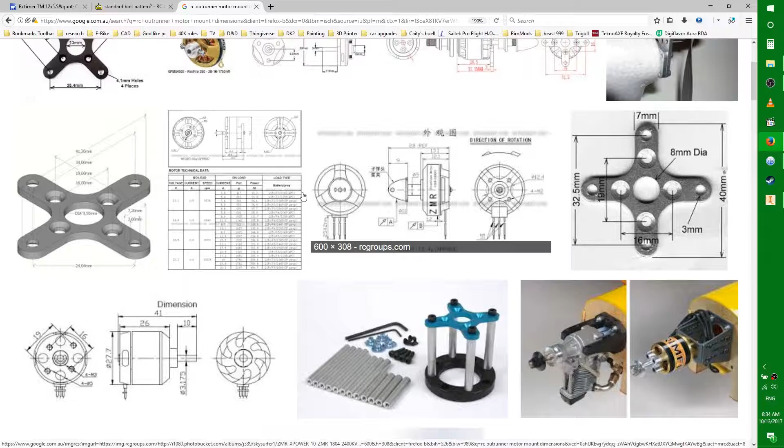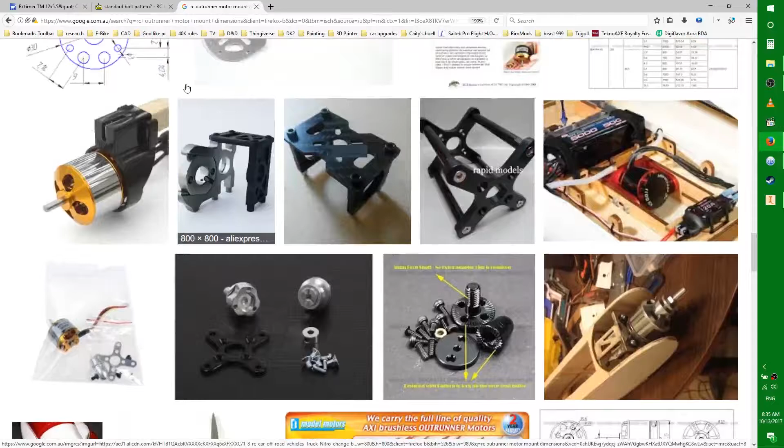Oh boy, did I open a can of worms I was not expecting. Holy moly, as the great Alec Steele would say. You would not believe what a kerfuffle it is in the RC industry. We have no uniformity. We have no standards. It's all over the place. It's like, what is going on? These guys here in RC forums put it best: this crap drives me crazy, in case you hadn't already guessed.

I'm with you, buddy. This seems sensible to me in a way, that we have like the 19 by 16 for the small motors, 25 by 19 for larger motors, and then a 25 by 25 for really big motors. You know, that kind of makes sense to me, but it would be cool if they stuck to that and only that.

Like you use this one for motors from this size to this size, you get your 28mm size, your 35mm size, and your 42mm size. So that 42 would be like 42 to 50mm sizes. So for my motor, it would be sensible to use a 25 by 25 hole pattern. But if you look at this, what is this, 49? Who uses a 49 bolting mount? Like what the hell? What is this?

And it doesn't stop there. Oh no, it doesn't stop there. When it comes to propellers, these are the propellers I'm going to be using. Now these at least have a standard. This is the bolting pattern for these propellers. You have a 4mm shaft hole, and then two 3mm bolt-on holes at 6mm spacings from the center. That is fine and perfect, except there isn't a single standard when it comes to motor mounts, other than they usually have 5mm shafts, and that's it.

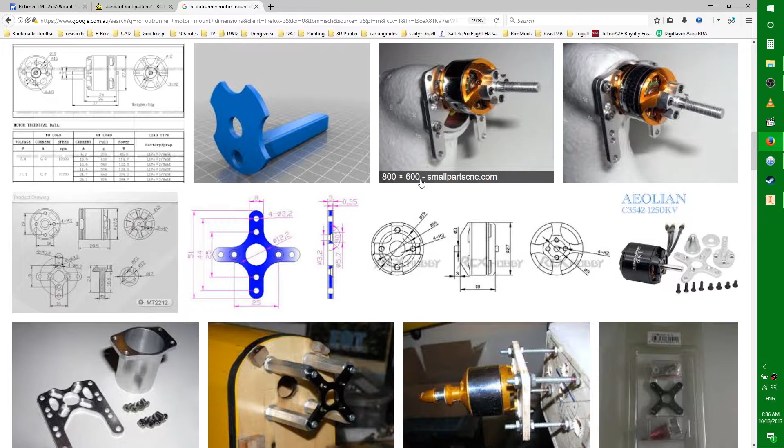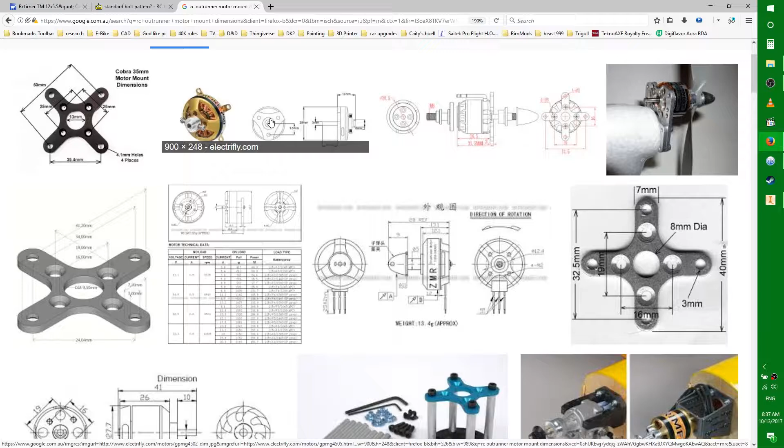I'm seeing bolt hole patterns. It usually sits around a 12mm spacing for 2mm bolts, but there's no standard. Is it a 4-bolt pattern or is it a 3-bolt pattern? They have no standards. Where is it? Oh, I saw one way up here somewhere. Look at this. What is this? That's mental. It's an adapter on the end of the motor there, but it's mental.

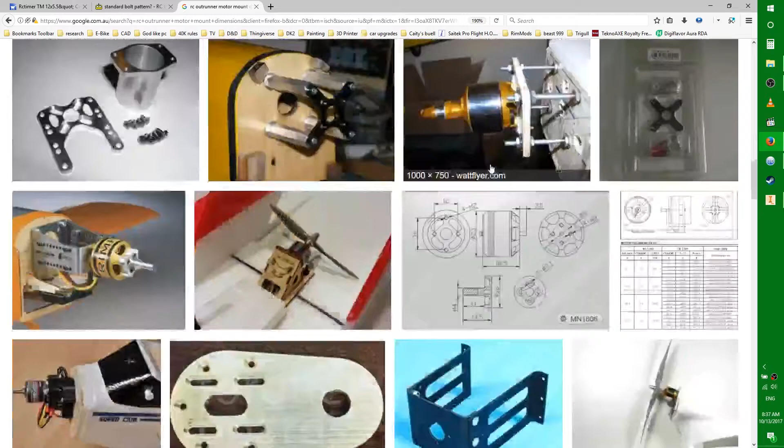There's no standards. I think this one's a 3-bolt pattern. Sorry, 4-bolt pattern. Like what? There's a 4-bolt pattern. There's another 4. Here, this one's a 3-bolt pattern. But again, it's like 12mm spacing for M2 bolts. So they at least have that standard, but they can't decide if it's 3 or 4.

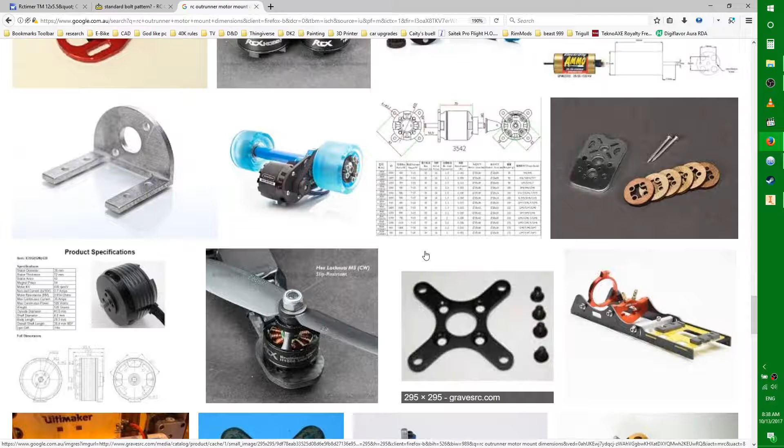So it looks like every motor manufacturer then has to come out with their own adapters for their motor, like these adapter sets, so that people can use the different kinds of propellers depending on the motor they're using. They decide what propeller they want, and then they have to pick and choose out of this pick and mix bag of adapter sets.

And usually you get these bolt-on motors, but you know what? I hate these. I really do. Since this disaster, and I'll put the video over here for you. Man, it took me forever to find that video. That is old news. That was a failure by a nut that came loose, and it dropped out of the sky on its maiden flight. Joy. So I don't like using those.

That's why I will only ever use this style of propeller, and I think these are the bee's knees. These are the best propeller you can have. It's carbon fiber, it's easy to make, and they're sturdy, with brass nuts. They just bolt on really well.

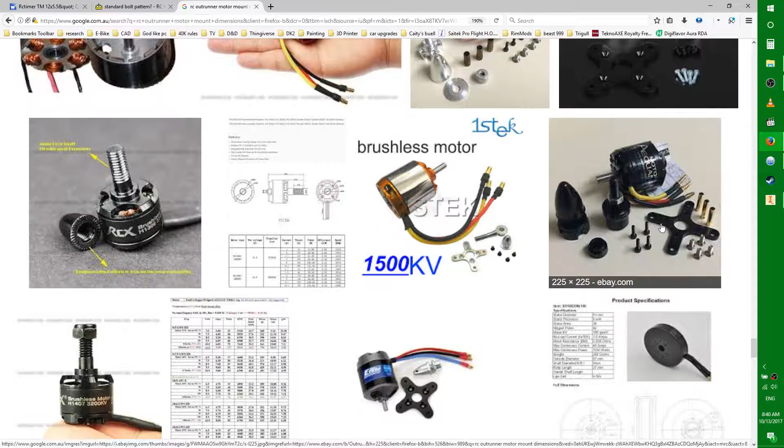So those are the ones we're going to be using, and we are going to say to hell with all this confusion and just do our own thing, because I don't plan on going to mass market with this motor. It's probably just going to be me. If somebody else wants the motor, then we can look at making an adapter plate. It's not hard, and there's probably an adapter plate that'll already fit what I'm planning to do, so not a big deal. So with that rant out of the way, let's get to making the mounting holes on the motor, and we can start on making the props. So let's get started.

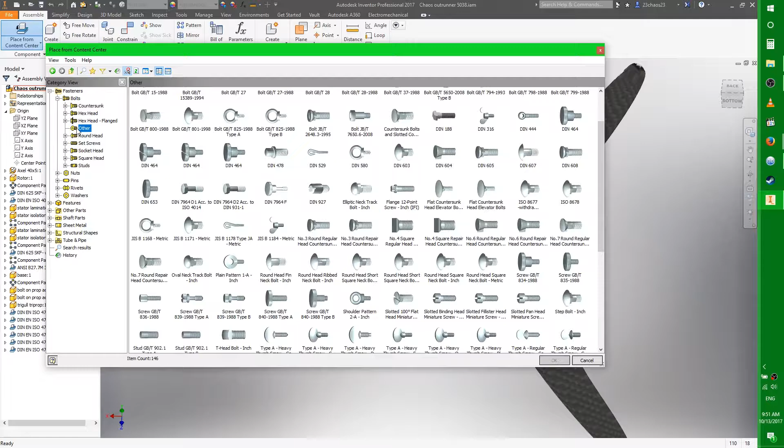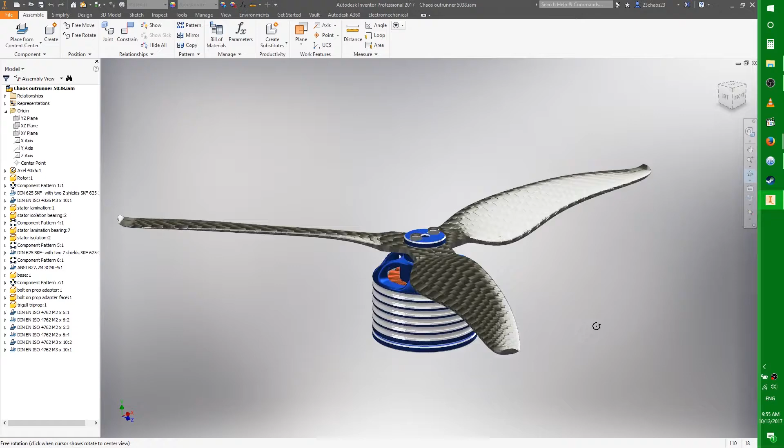Wow. That was quite a bit of work. Yeah. It looks good though. I do like this prop, and we are going to make this prop. It'll be quite easy. I just need some funds to get some carbon fiber and the resin and stuff, and I can print the molds, and I can show you how to make these props. It's so easy to make these props.

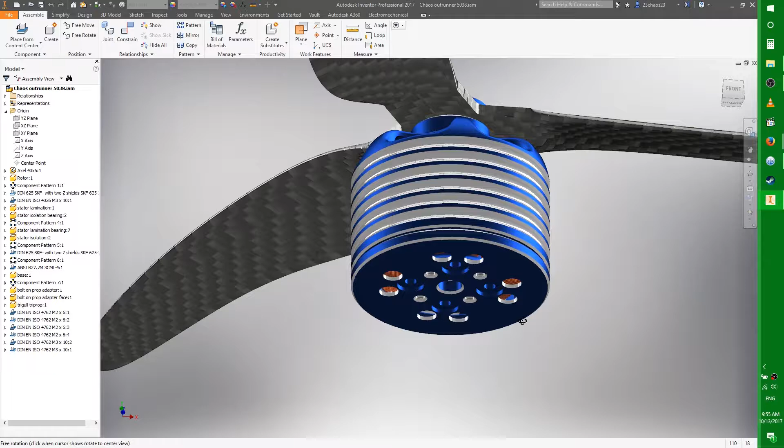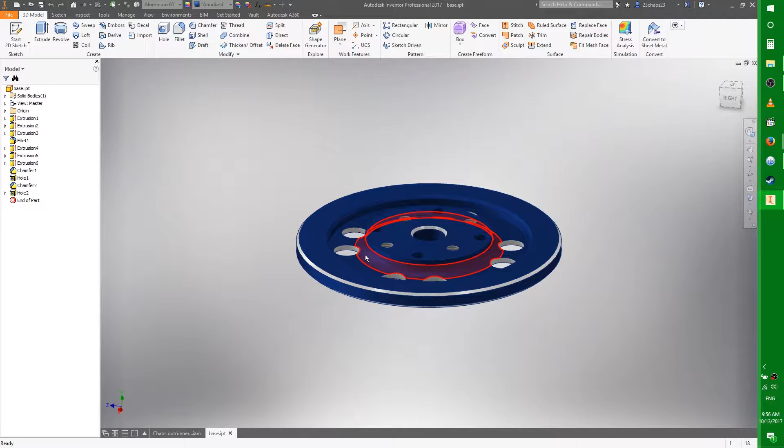So we went in to go put the bolt holes in the bottom here, and we ended up going with a 19 by 16 pattern, because the 25 by 25 pattern would have interfered with, you probably saw there in the time-lapse, the 25 by 25 was cutting into the side of the meat here, and could potentially, if somebody used the wrong screw, go into the stator. The stator is stationary, it's not turning, so it wouldn't be too much of an issue, but if it shorted something, that would be an issue, and we don't want that.

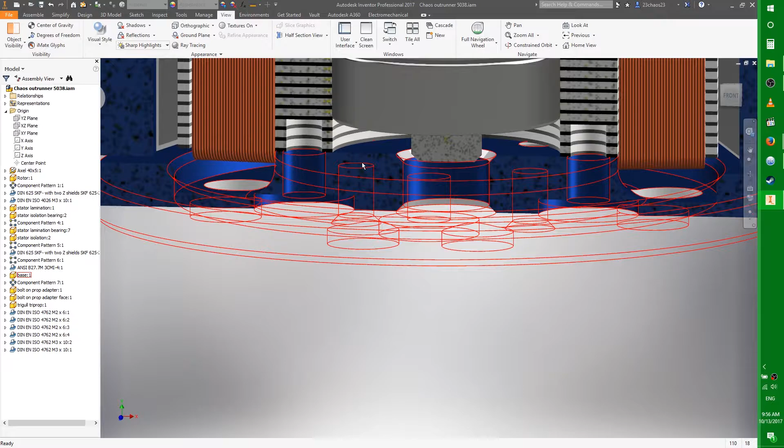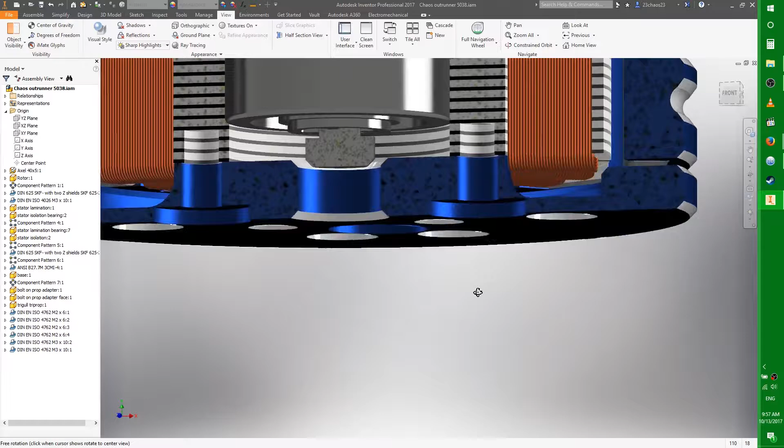So I went on the side of caution and decided to put them in the meat of it here in the middle, so you can see here when the bolt goes into it, there's a lot of meat there for the bolt to bite onto. Good 4 millimeters, so that's a decent amount of meat for M3 bolts, and you got 4 of them potentially. So it'll just come into the bottom and hit the actual laminations of the stator rather than the windings, whereas the 25mm ones that would be sitting out here would come up through this part and be touching the windings, which we don't want, because the windings already come down beyond the bottom of the motor here.

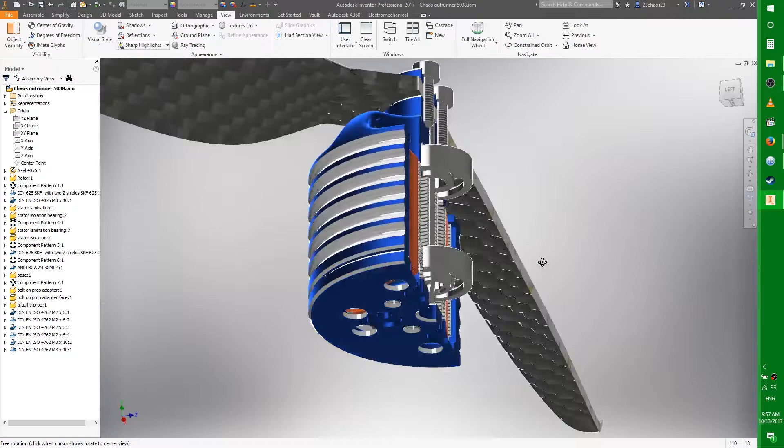The bolts in for this bolt-on prop style adapter. I've decided we're just going to make adapters for this. So this is the bolt-on prop style, and we'll make another one for the T-nuts, the props that I hate, the prop nuts. T-nuts, it's so bad. You can lose your drone so easily if you just don't tighten a nut down properly, or it just comes loose or something.

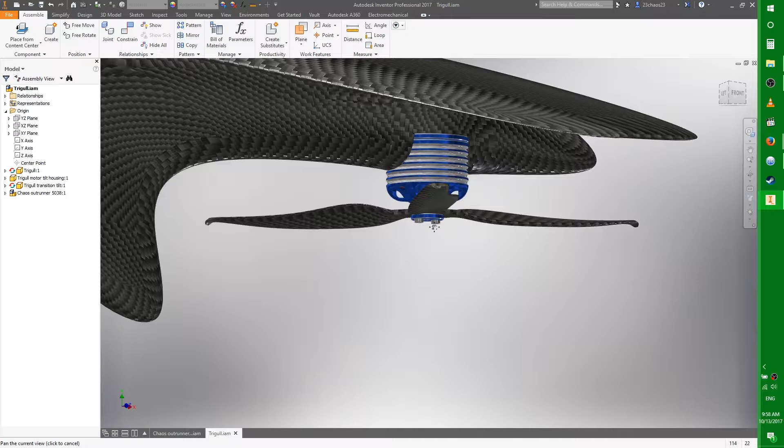The propellers came out okay. I might make some adjustments. I might make it more aggressive. At the moment, this one is in upside down. Because if we open up our main assembly, you'll see here it's upside down. So I only realized this after I constrained it. Okay, yeah, that'll be an issue. So what I'll do instead, make sure stuff is saved, and then we come back here and we place our tri-prop, and now it'll be the right way up.

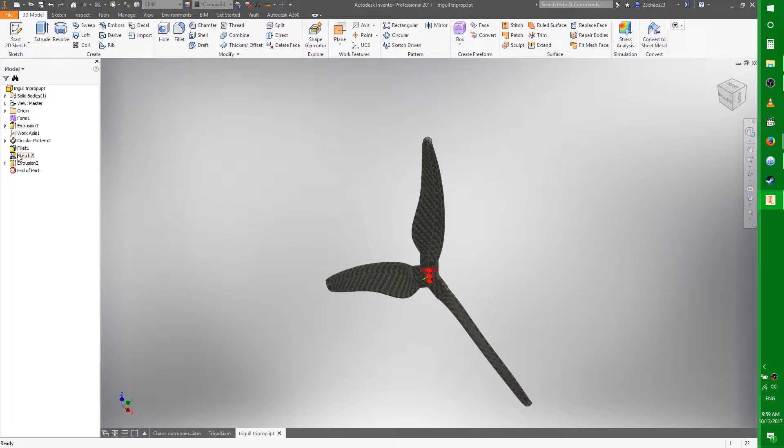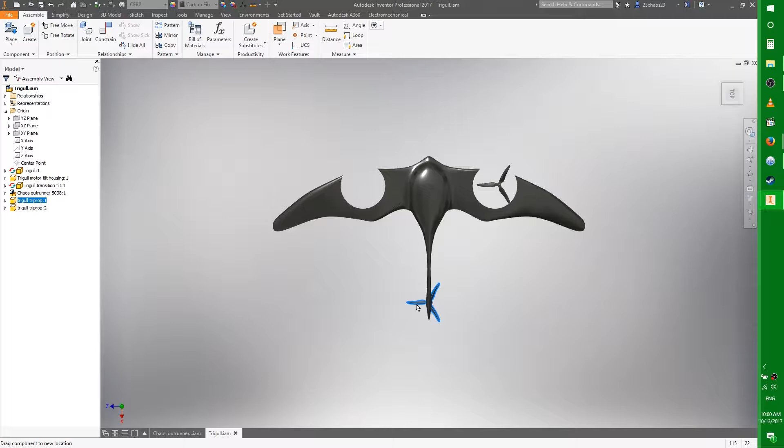Let me just open this up and kill that sketch. Oh my god, why does it do this? So now we can go and attach the prop to the thingy. And the other thing we can do, because it just makes life so easy, we copy one, and I want this one over here, so that the front section here is turning inwards. Place you like so, and it just starts slowing down, and I'm not sure why it's doing it, because it's not a graphics issue and it's not CPU.

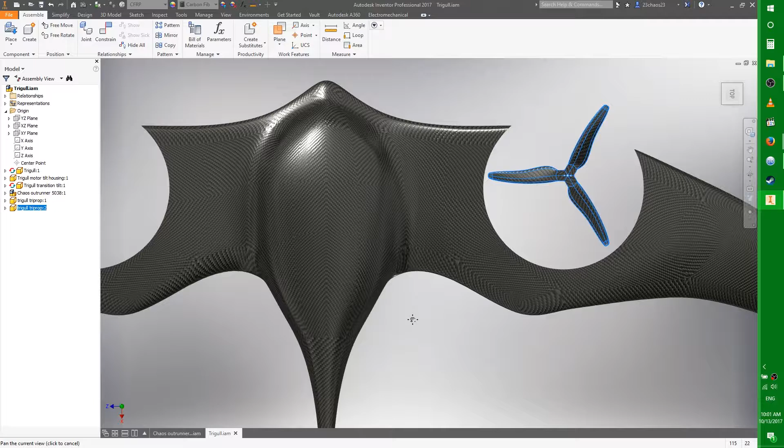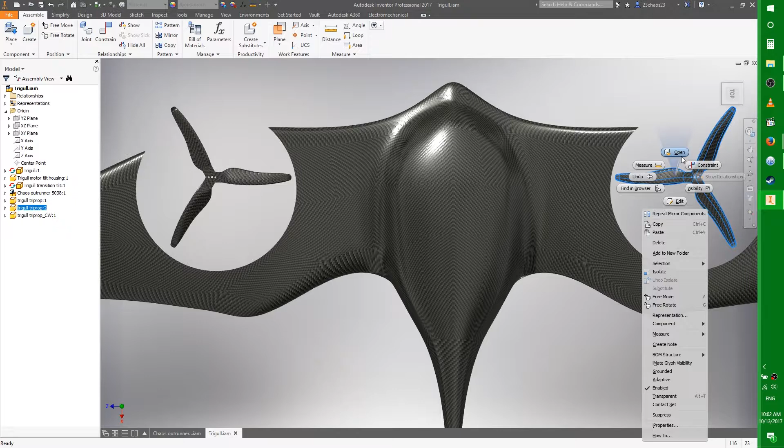So we got this one here, and then all we do is we say mirror, mirror plane, suffix would be CW, apply. And now we've got a mirrored one, so we've got a counterclockwise and a clockwise. And close this. I need to rename this one, so if we open this, you know what, we'll do this. Save, we'll save and close, yes, save and close, and then, oh, don't tell me, oh, there they are. Whew, thank God, I was about to lose my shit.

Where have my files gone? Counterclockwise, cool, so we'll rename them so that they're correct, and we'll grab these at the same time. Cool, and now when we open this up, it's going to throw an error, because it can't find anything. So Trigull triprop is now Trigull triprop, plop, plop, plop. Trigull, triprop, counterclockwise. And is that it? That's all it decided to throw an error for?

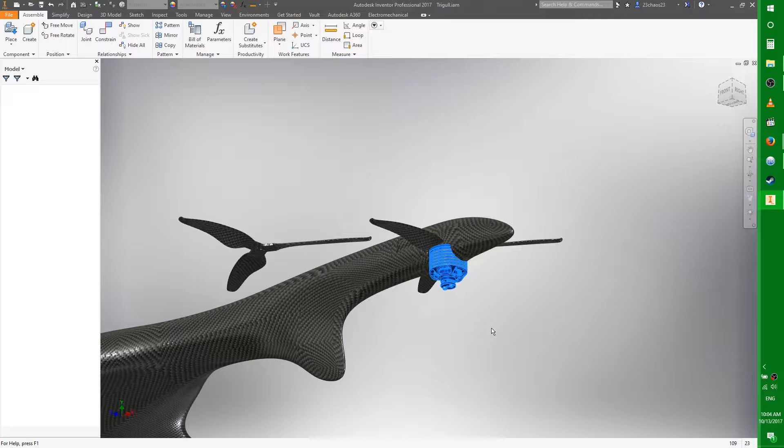Open this assembly. Are you going to throw an error as well? No. I moved these files, and it worked out where I moved them to. How clever is that? They were in a different folder, and I moved them into another folder. And it went, oh, you moved them into a different folder, not a problem, let me fix that for you. But I renamed the prop, and it goes, where's the prop? I can't find the prop. The prop has gone for a walk.

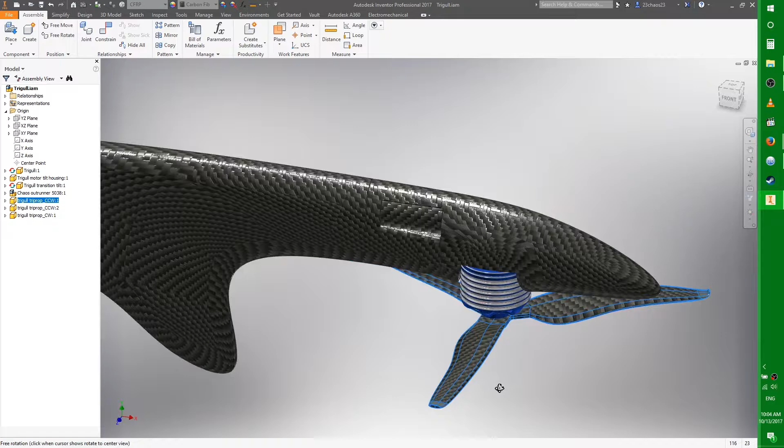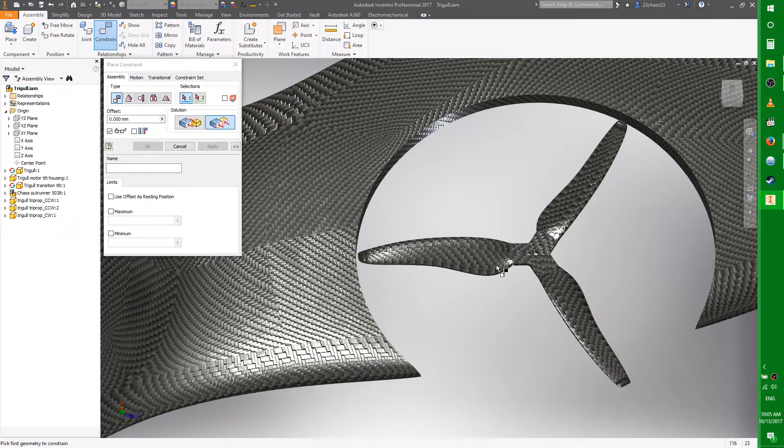Oh, so funny. Let's just get these in place, so everything looks professional. Come on. There we go. Actually, what we can do, this is how clever I am. Only just realized, hey, why don't you just do this? And we constrain them. None of this moving shit around business. There's no flat surface. I need to make a flat surface so I can constrain stuff better with these.

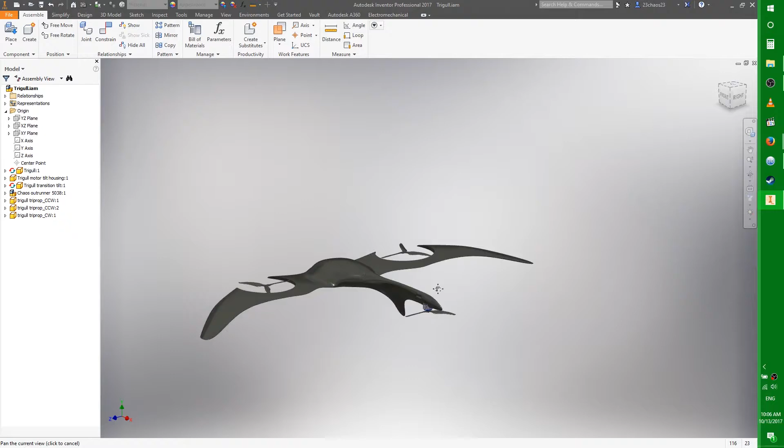Anyways, look at that clearance. Oh, look at that, it's beautiful. I don't know why I put the little flared tips on these when they're going to be mostly shrouded, but the back one won't be, so that one needs the shroud. And the back one, yeah, it's the right way up. Cool. Oh boy, yeah, look at that. That is some sexy stuff right there. This is R-rated, ladies and gentlemen. R-rated. Hide your children.

Fantastic. We shall save. And we will call that a day, I think. Yeah. We'll call that a day.